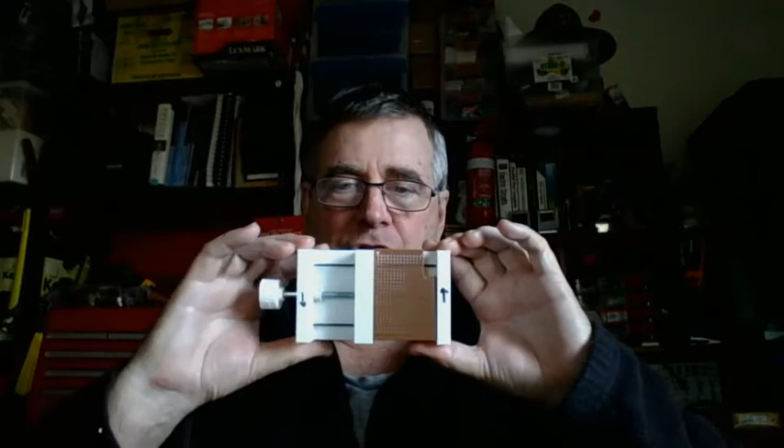This is a prototype of what we're trying to build, which is a PCB board holder. This prototype functions and works, and I'm physically using it, as you can see. I've actually used it to do a bit of soldering work and cut some stuff, and it works just fine.

I went from that to this, which was a failure. It was a failure because this bar is too high, and it still works, as you can see, but we've had some feature creep.

We've now got a handy helper arm which isn't really doing what it needs to do, and the hardware that's in that is going to get recovered, and we're going to go to this, which is the final candidate, and this doesn't really work for me either.

The holes are just a tad tight. PCB holders in there.

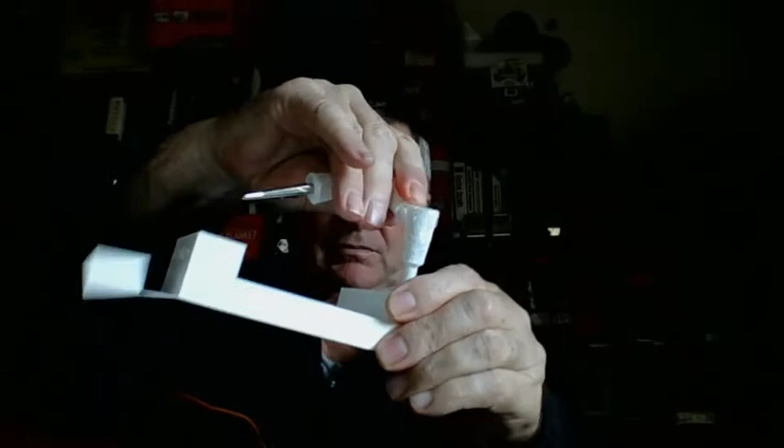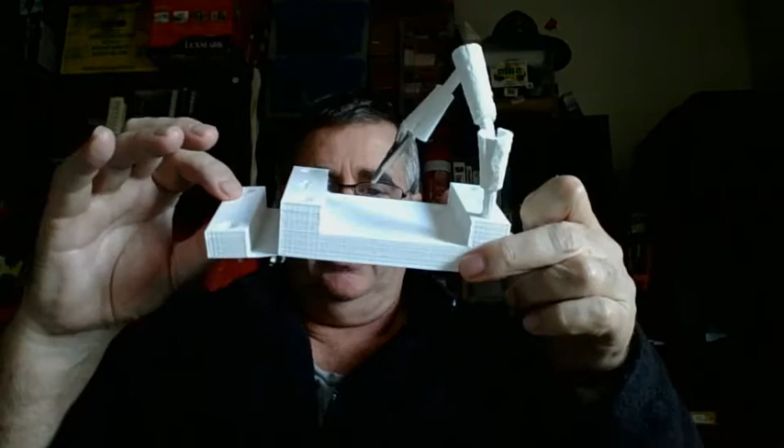The idea is the handy helper arm's in there. It works. It's got modifications in that it's got accessory holes and mounting holes in it, and this will be the final design. I'm not going to muck with this anymore. You're more than welcome to muck, but this is our final design.

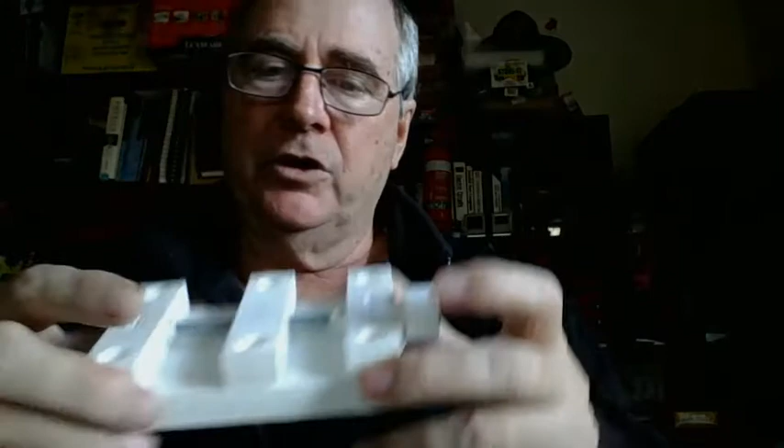In getting to this, we went from this to this to this, and as you can see, I haven't bothered assembling it. I've got to take the hardware out of this one - this was a failure, it's got to get recycled - but I'll take the hardware out of that, put it in the new one, and that'll be it. I'm not going to muck with it anymore.

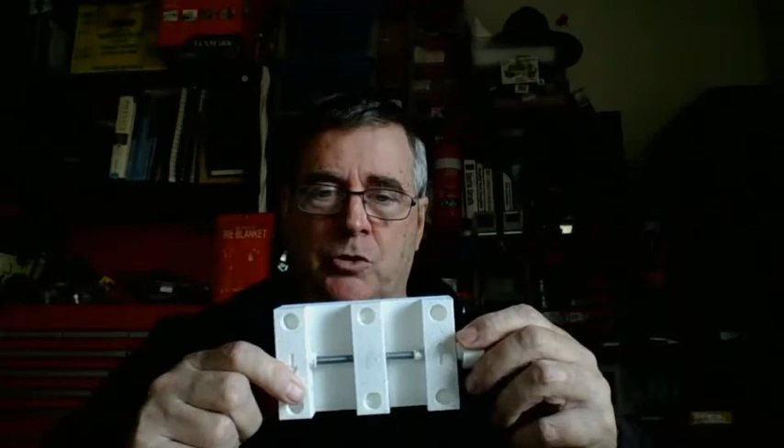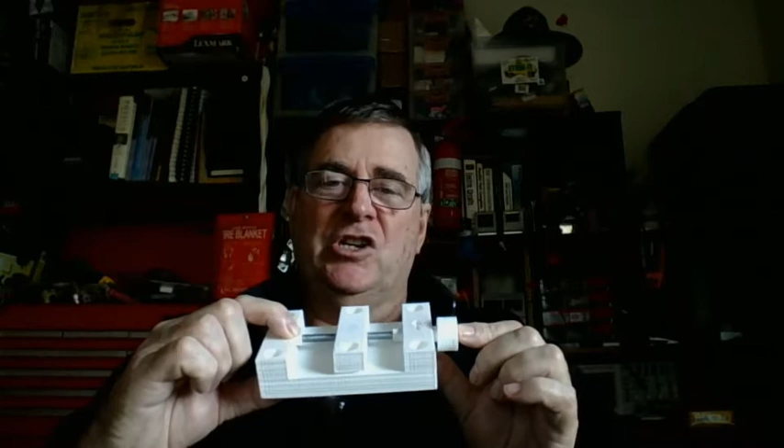You need a bit of hardware. You're going to need a bolt that's that long - it's a 6mm, 6 mil. So that is from there to there is 10 mil. It needs to be at least 10 centimeters - from there to there is 10 centimeters. It needs to be at least 13 centimeters long, this bolt. It doesn't need to have thread for the last 3 centimeters, so it's got to have at least 10 centimeters of thread, and they're M6, so they're metric 6 mil, and they're a standard gauge, right?

So I haven't gone to any expense there, and that's a standard 6 mil nut in the center of this, so that when you look, you see there's a hole there to take the nut, so that it winds forwards and backwards with that. So that's just a nut and a bolt. Nothing special.

I've cut the head off this one and used my own system, but there is an option with this that it's made to fit over the hexagonal head of a normal bolt.

This has the option of the handy helper accessory holes, but you can also use that for extendable jaws.

So you can make specialized jaws and plug them into those holes, and then it can hold odd shaped PCBs, for example round ones or hexagonal, stupid shaped, odd shaped. I think the iPhone has now got, and I know the Nintendo Switches have a stupid shaped board. So whatever shaped board, you can make a jaw and push it into the holes and hold the board securely while you work with it.

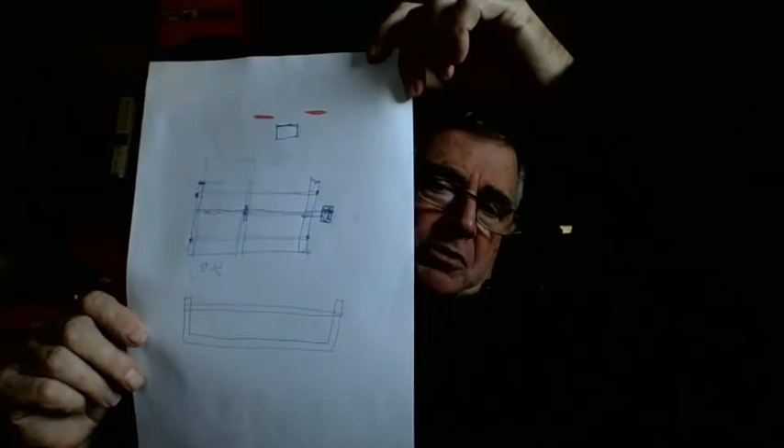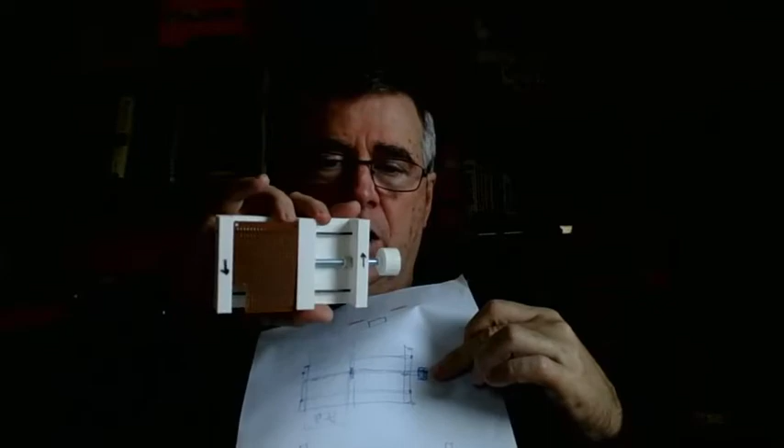It's got bits of coat hanger wire as guides, and that was my thinking. I could use an old coat hanger, and I had these. They're galvanised, they were hook shaped. They had a hook in them with a thread, and you'd put them into a bit of wire — they're there really for hanging a bit of wire between, and you tighten them up, and the wire gets tension on it as you tighten it. That's what they were, they were two hooks.

So I had two of these things, and I chopped the ends off them with a grinder. I'm going to assume that you're going to have the correct hardware — it's just going to be a bolt, more than 13 millimeters long, and it's an M6. I've made it to 6 mil.

And you can use gal to save a bit of money. This doesn't need to be stainless, but if you've got stainless, well, you've got stainless. It's more expensive, but it is what it is — you got what you got. You can get some threaded rod if you want to, and just grind one end of it down. If that's all you've got, then just get that. And you can get that at the hardware as well.

I went to the nut and bolt place. I always go to specialist shops for whatever I can and support them, because they rely on you doing it. And even though they're a bit more expensive, sometimes they're not — sometimes they've got exactly what you need at the right price, and sometimes they don't have exactly what you need, but they'll come up with something.

I've always gotten myself — you know, if I need tools, I don't go to the hardware for my tools, I don't go to the supermarket. I go to a tool place, and I support them, I give them my business. And if I need my tools fixed, I go to the tool place, and if I can't fix it myself, I take it there. Sometimes I need bits and bobs of cheap tools, and they laugh at me, but they fix it, and they charge me for it. And they said, for what you paid for that, you could have gone and bought a new one from the supermarket. And I just said, but I want to give you the business, so I do.

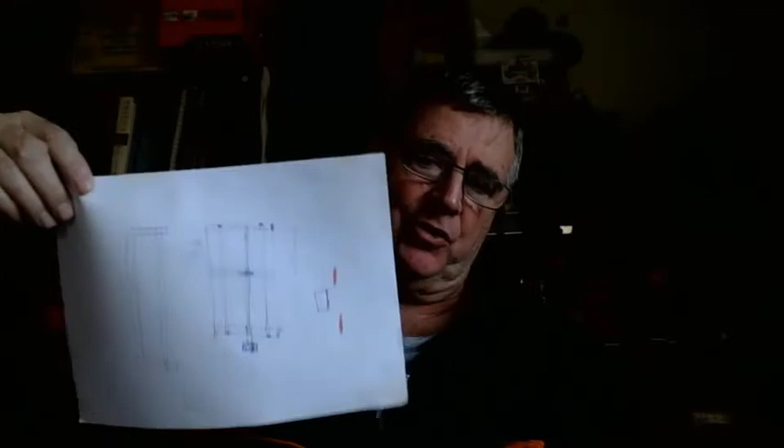I want to show you that with ad hoc design, I mean, that is a structured start. And most people start building something and fiddle with it, and then they come up with something there and they think, oh, that's terrible, and they turf it.

And then they come up with something like this. In the handy arm, I ended up 3D printing a bunch of stuff that I didn't end up using - I don't know where it's gone, I've got stuff everywhere here. Sorry, here it is. So then I printed these things out, and as you can see, if you want to, you can add them to your arm, so you can get your arm way up here somewhere.

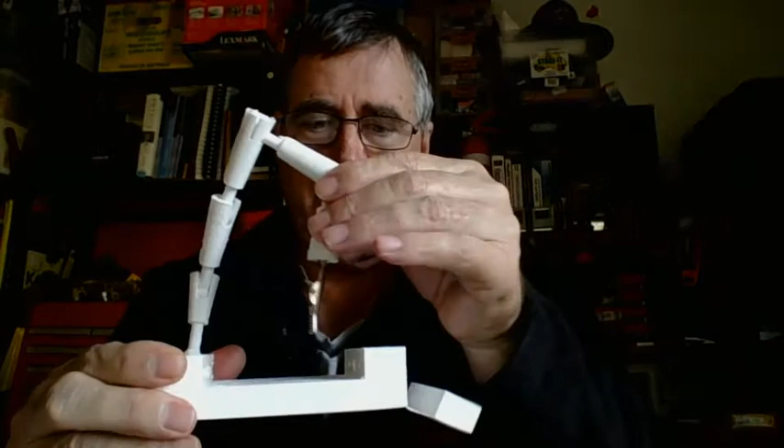Right, so now we've got an arm that looks like that. It still works, and now you can really get jiggy with where you want to put things on the board. You've got complete freedom of motion there.

It's up to you. You can keep building components for it, and build things to hold specialised whatevers and bizzos and whizzos and crizzos and stizzos till the cows come home. So let's get into it.

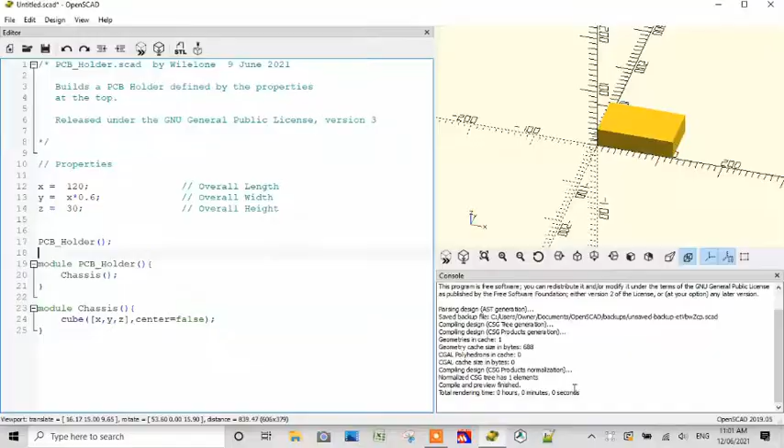I'm going to swap cameras. Okay, so I've got a problem. Right, there we are. Okay, so hi, back again.

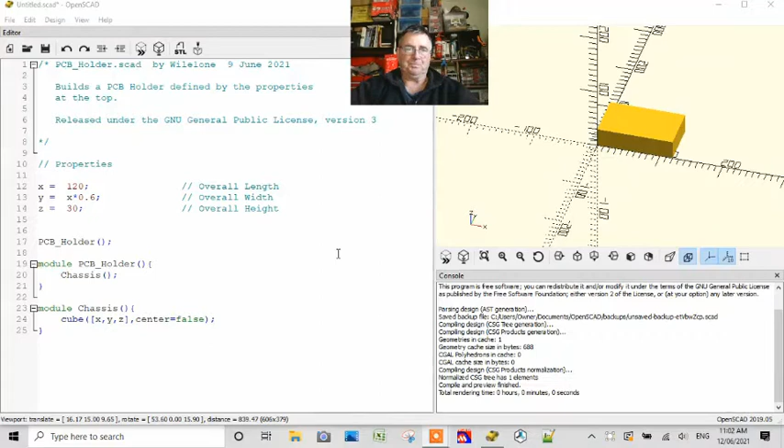So I've quickly thrown this together on OpenSCAD. Let me give them a bit of a shout.

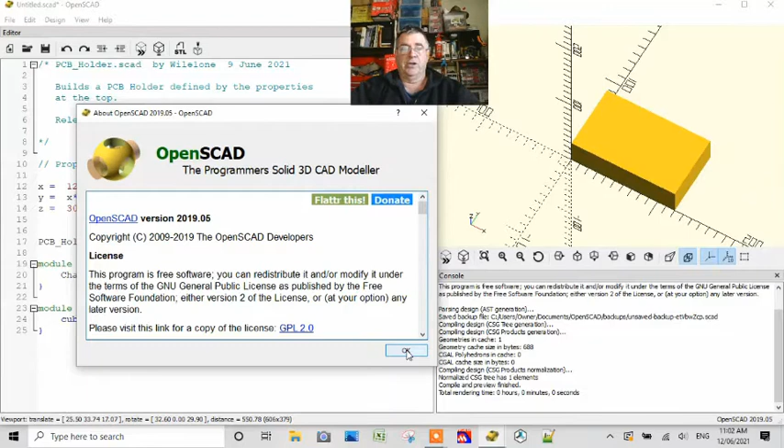Right, so I'm using OpenSCAD as the CAD system for our PCB holder, and what I'm starting out with is a square block of plastic. Here you go. I decided that I want the width to be 60% of the length, so that's how I've designed this. You can change these to whatever you want them to be. I'm going to start with that.

Now I need another dimension in here, and that is the support width. So I'm just going to call it SW equals 10, and I'm starting at 1 centimeter, for those of you that need that.

Right, so once again we're doing modular design. We've got our holder, which consists of a chassis, and I'm just going to create the void. So I'm just going to go here again. And this will be x minus 2 of these, Y plus 2 mil, and Z's fine.

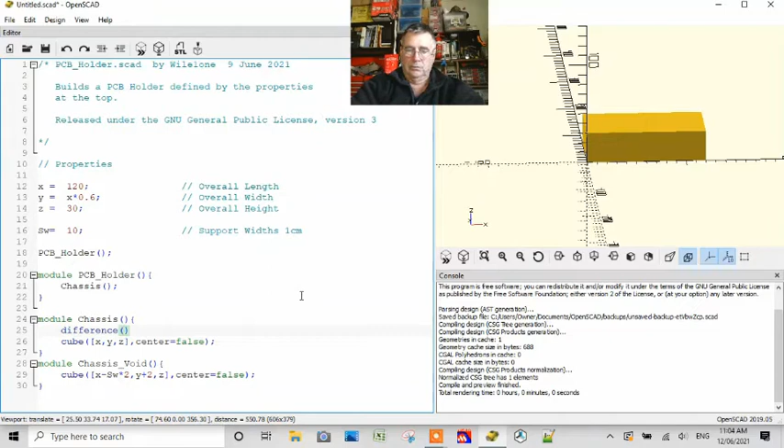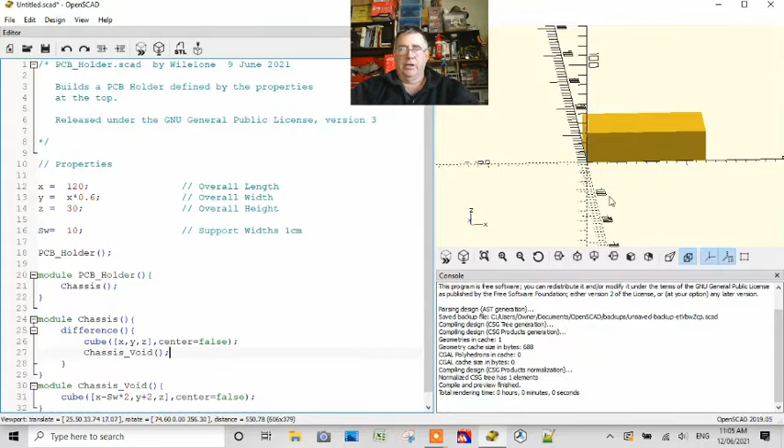Right? And to get our chassis, what we need to do is we need to difference, we need to cut this out. So we want the chassis, and then we want the void cut out. That's how we're building our cube, our base. And right now, if we do this, we're going to get it cut out in the wrong place. Let's just show you what's going to happen. Okay, so it's in the wrong place, nowhere near where we want it.

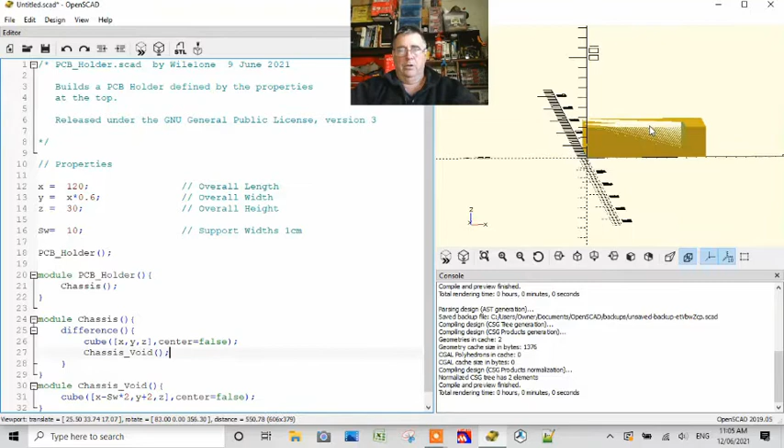The length is fine. What we need to do is translate this, move it. So we're going to do a translate, and we're going to move our cutout in the X direction, that way.

The camera is facing in the wrong direction. In the X direction, which is down here in this direction, we want to move it the width, the support width. So we want to go SW, in the X direction, positive, which will put us correct.

Now let's just go 0. And in the Z direction, we want to come up the support width.

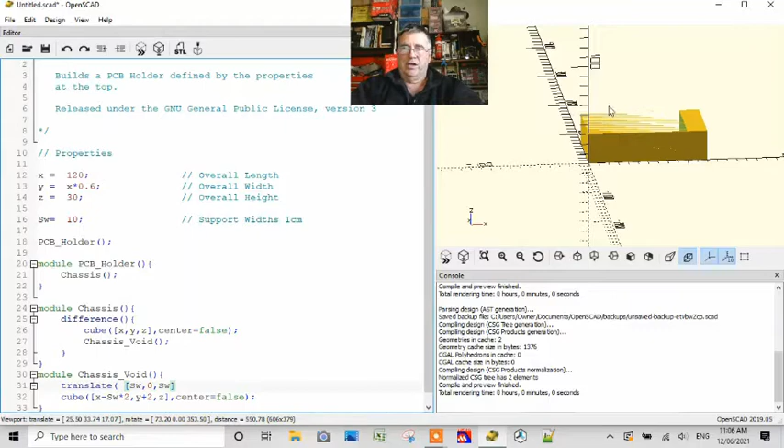I know this is going to be a problem because we're not going to come through the inner wall. Let's just do this to show you what happens. You see all of this here? All of this stuff here? It's because we've not penetrated the wall. And so to make sure we get penetration, we've added 2 mil.

So if we go -1 here, we're going to penetrate 1 mil either side. So let's close that off, and we should get our thing where we want it. And there it is.

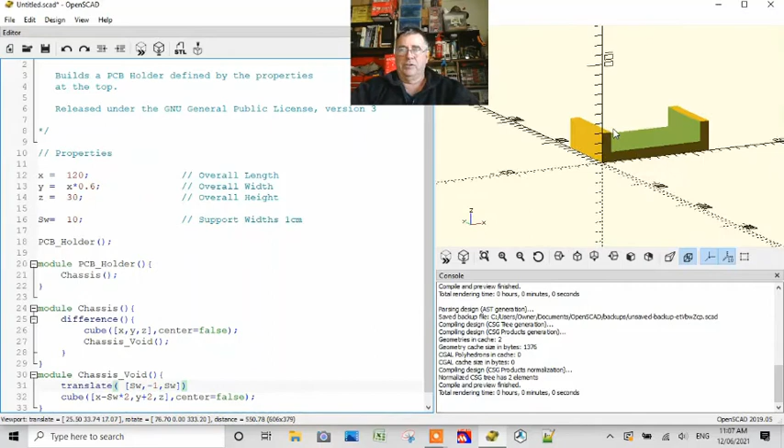Right, so there's our bed. Just like that, we've got our chassis and our void. That's pretty cool, isn't it? Everyone like that? I like that.

Now we need another couple of things. In one end of this thing, we need a hole, and in the other end of it, we need just a little thing for the screw to sit into, so just a rebate. So we need a hole through one end and a rebate through the other, and we need it.

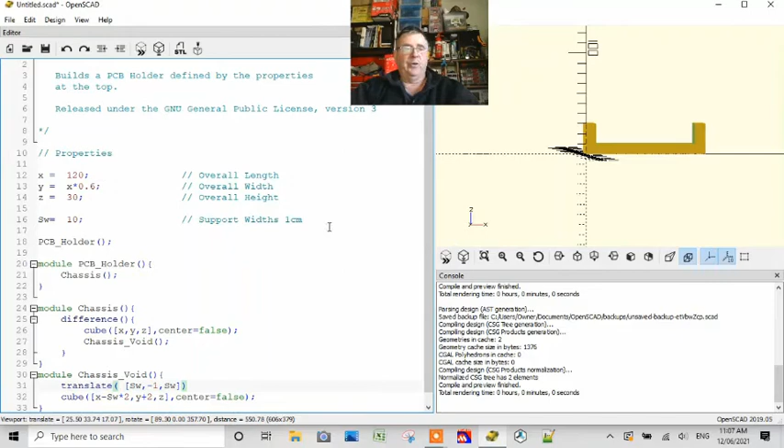Now we didn't say how big we want our hole to be, so SHD, the screw hole diameter, is going to be, I don't know, we'll make it an M6, 6 mil. I don't know what that needs to be yet. We can come back and change it. And this will be our screw hole diameter.

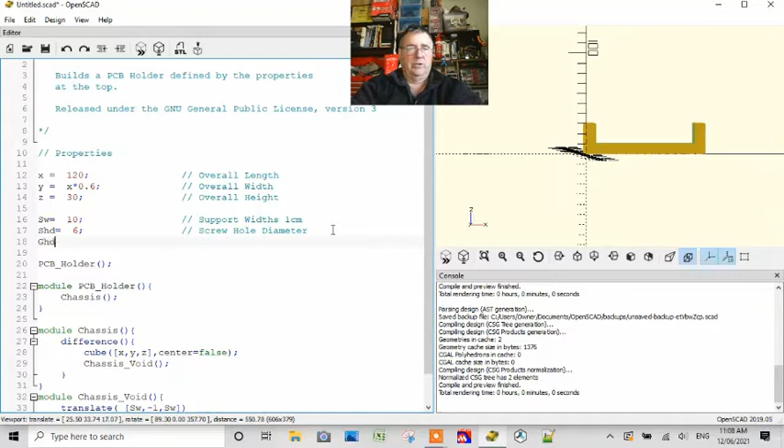And then we're going to do a GHD, and that's at the moment a piece of coat hanger wire which is about 3 mil. And that's our guide hole diameter. So let's add them to our void.

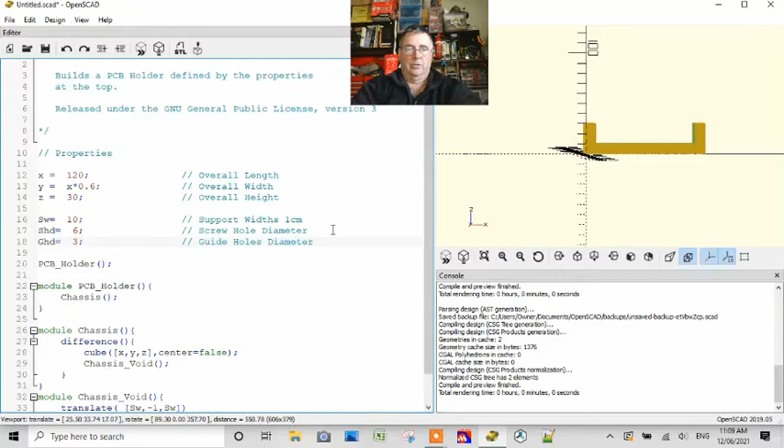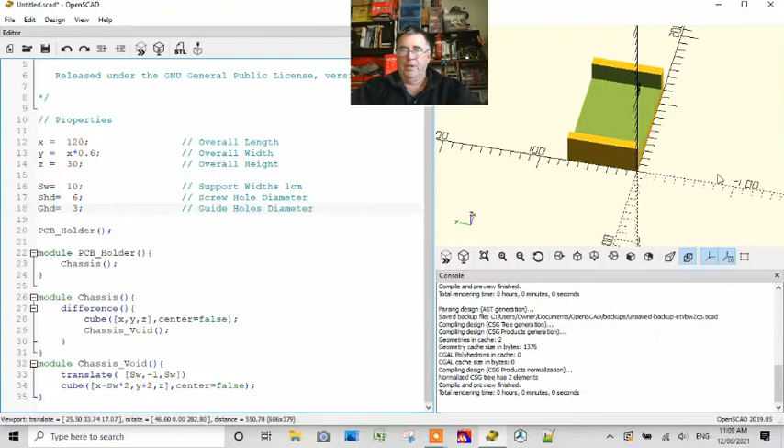Right, so we want a cylinder. We want one cylinder that we need, well actually we need 2 cylinders that penetrate and 1 cylinder that just creates a rebate in one end. And that's pretty simple to do.

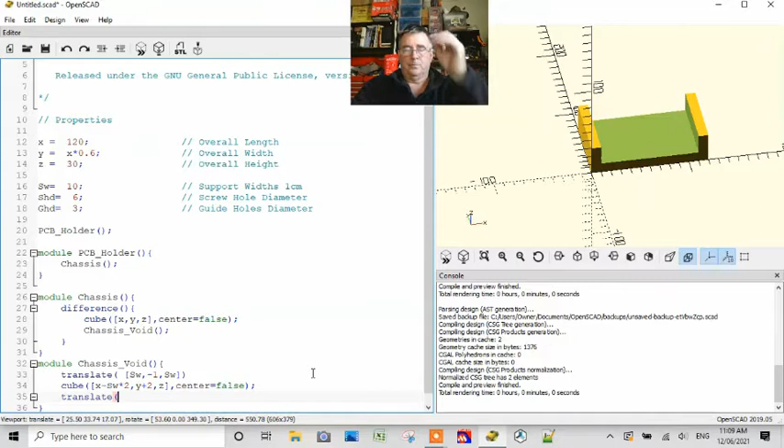So let's go again into our void. Let's create a guide hole. So let's go, we want a cylinder. We're going to translate this thing, and we're going to come in the X direction of -1.

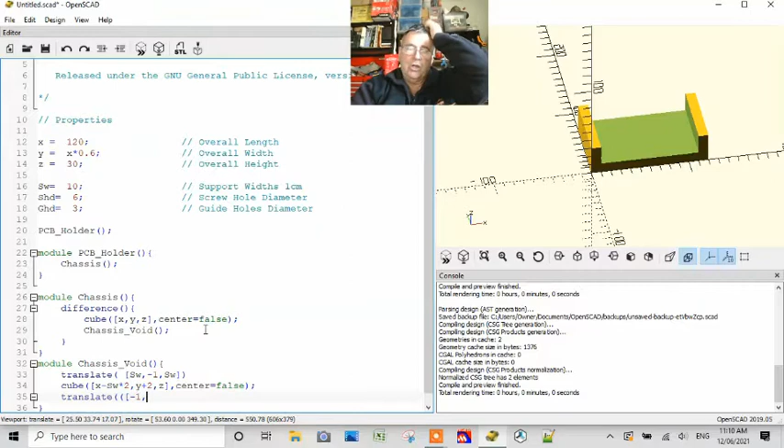So we want it to go through the end of the guide here. So in our X direction, we're going to travel -1. In our Y direction, in our first guide hole, we want it to be in.

Let's go with the SW for the moment, and we might put some kind of a factor times 1.2, you know, just for the hell of it. And in our Z direction, we need to be the SW times 1.5.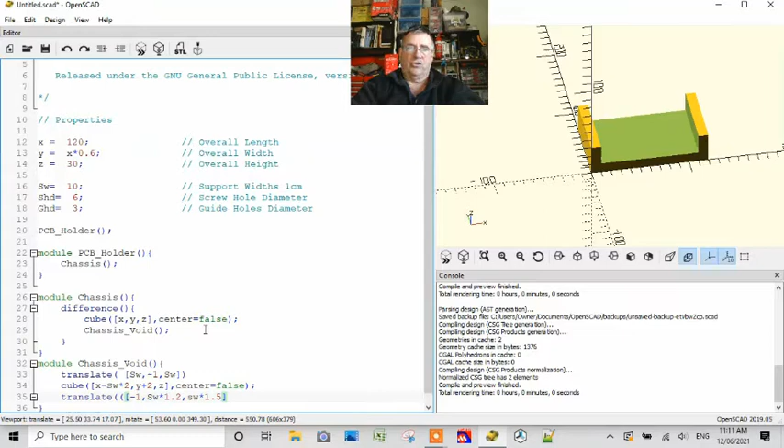SW times... now we're going to have to fiddle with this one. We don't really know where it's going to land in a final version, but we'll go at 1.5, which will put it slap dab in the middle of the bed. It will be at the bottom of the slide, but at the moment it'll be slap dab in the middle of the bed. And we want a cylinder.

And our H equals 2 times SW. Oh, no. No, we've got to rotate this thing. Oh, I'm getting ahead of myself here.

So we need to rotate this thing around the y-axis by 90 degrees. So we're going to do rotate, 0, 90 degrees in y, 0. And that should put us in the correct orientation.

And our height is going to be the length, x, plus 2, because we're going 1 mil penetration either side, right?

Our D equals, what did we say? D is guide hole, GHD, comma. Our center equals false. We need our facets, $FN. 60 will be fine, 60 facets around this, so it cuts us a nice round hole. And we want our center to be false. Center equals false.

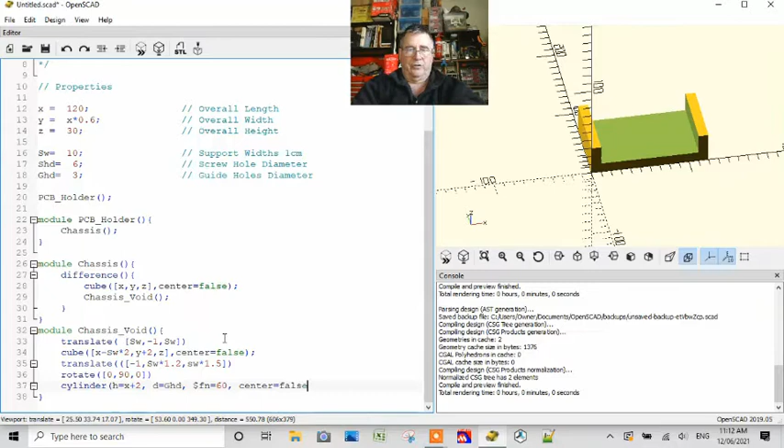All right, let's see what that gives us. Whoa, what did we do wrong there? Rotate. Doesn't like something. Oh, here's our problem here. We've got too many brackets. Right, let's have a look.

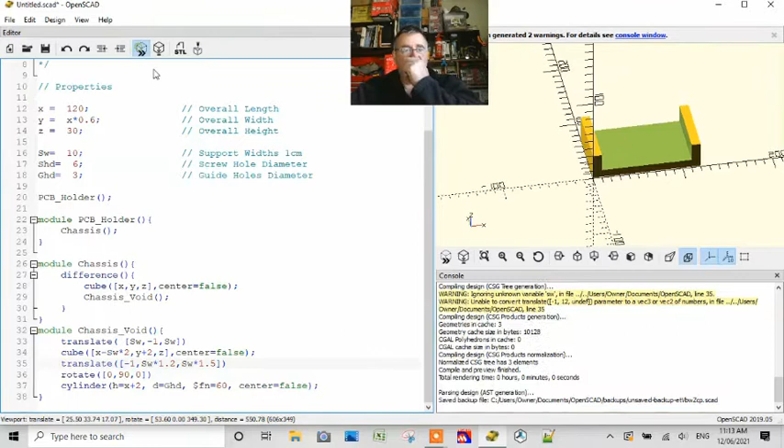SW is wrong. That needs to be a capital S. So let's see, come on, have you put a hole through it? Yeah, look at that, put a hole through it. There it is, right through the lot. It's dead smack in the middle of the other one.

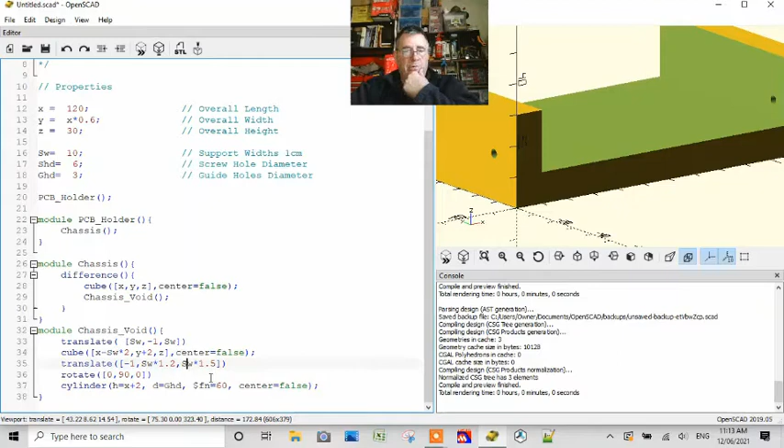Now, I'm just going to bring this and call it GH, guide hole Y, and bring it up here. GHY equals Control V.

And that's our guide hole indent from the edge.

And we want a HHZ, which we've said it's 1.5, and that's our guide hole.

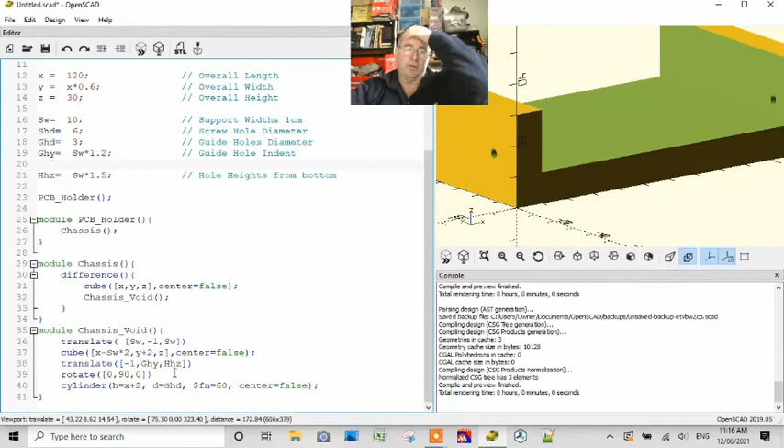Now we've got to mirror this on the other side. Now we can use mirror, but we're not going to. We're just going to do the same again. We've already got some code, and we're just going to recycle the same code and just move it over where we want it.

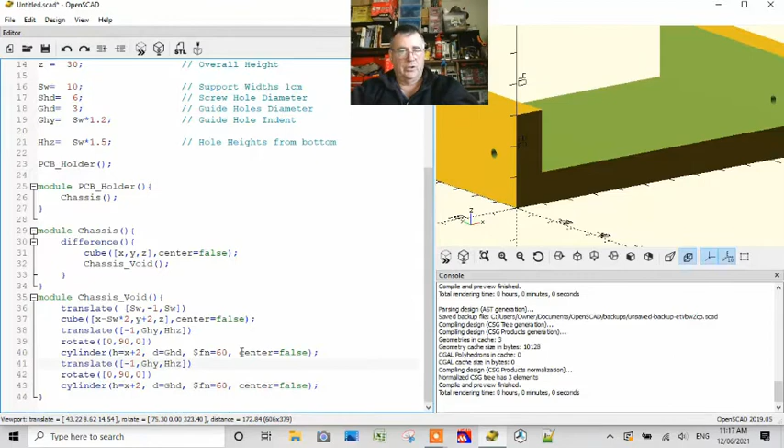And this will be in the Y direction, the Y minus - it's going to be Y minus that, so it indents inwards. Let's just run that.

Ooh, what did I do? What did I do? Variable Y, why do we have that? What do we do there? How did we get that? I don't know. I think, folks, I'm losing it. Okay.

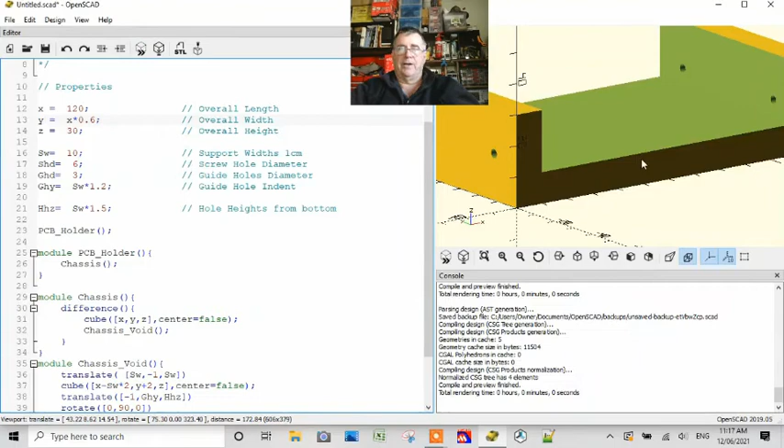There's our two screw holes, our guide holes. We're not going too bad. We're doing all right, we're doing all right.

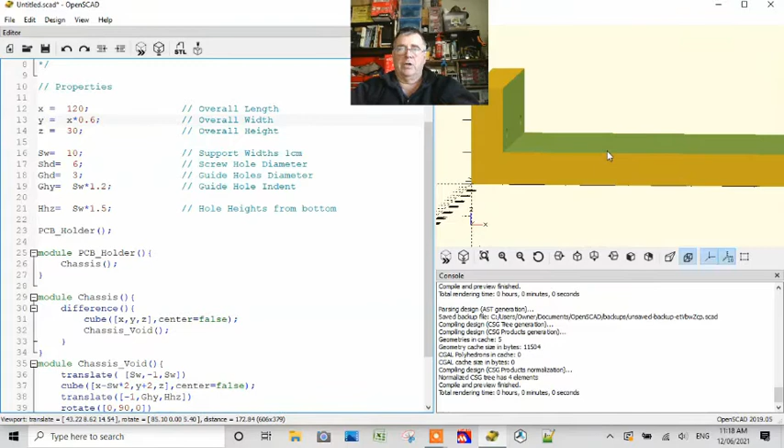Now what we've got to do is put a screw hole through the center, but it just needs to be rebated on one end and through at the other. So our rebate just needs to be so that the screw can turn inside it. So it needs to be slightly thicker than the screw's going to be. At 6 mil, it's going to be like if it's an M6, it's going to be right there.

So we want to just give it a bit more. We want the thing to be able to turn freely inside. Now we're mucking up our neatness over here, and we're just going to tidy that up a bit. So just give it 0.2 of a mil so that it'll spin freely. That's all, it just needs to be slightly bigger than the screw.

And that's going to come in here too, and we want another cylinder for that. Now what I've done here is, okay, so this is the bed rebate. This is the right hole.

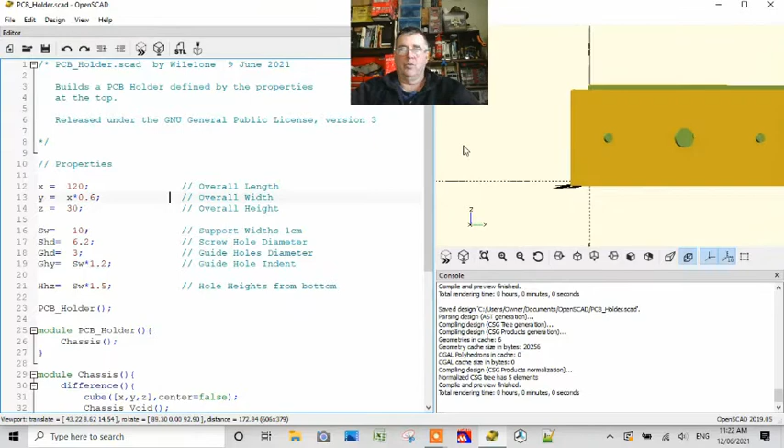But let's run this, and there's our screw hole. You can see at one end we've got a rebate, and at the other we've got a right through the middle. So there's our bed built. It's completely built, that's what we're going to end up with.

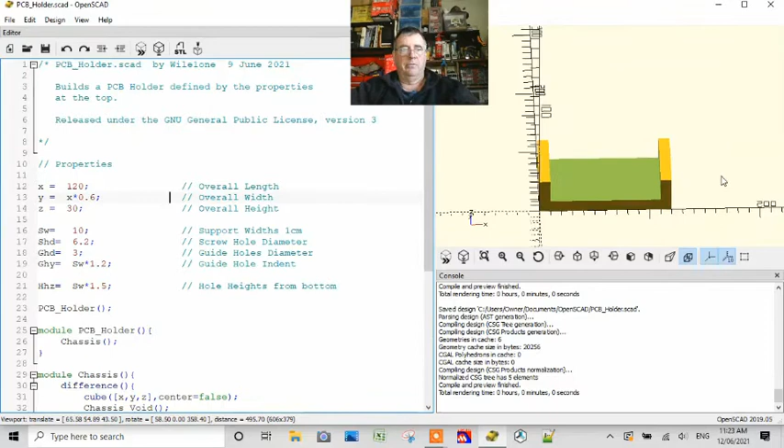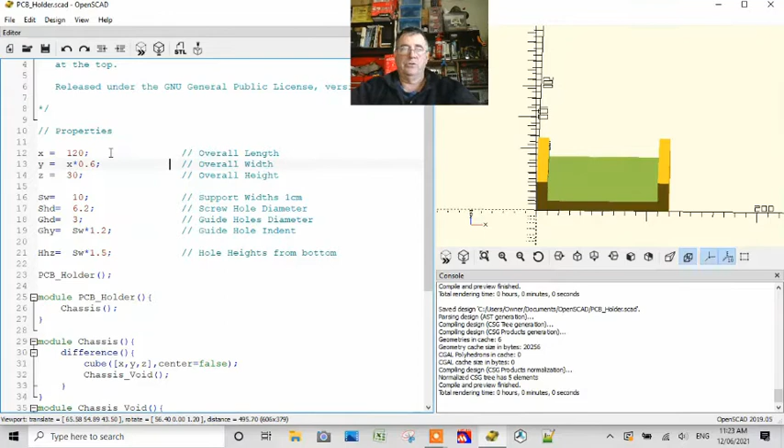And now finally, we've got to put our sliding piece that sort of travels backwards and forwards. Right, so we've already got the dimensions for it. Believe it or not, we don't need to give it any more dimensions because we've got everything we need. And we're just going to make it. So we're going to call this the slide.

For the moment, we're going to build it in the middle of the thing, so you'll get an idea of what I'm on about. But then I'll move it to the end so that when we 3D print, it'll print the two sections as one job.

Because I want to move it later, I'm actually going to define the translate up the top. So I want to be up here, and I'm going to put a translate here. I wouldn't normally put these in this spot, I'd normally define them as a variable up the top somewhere. But for the moment, I'll put it up the top.

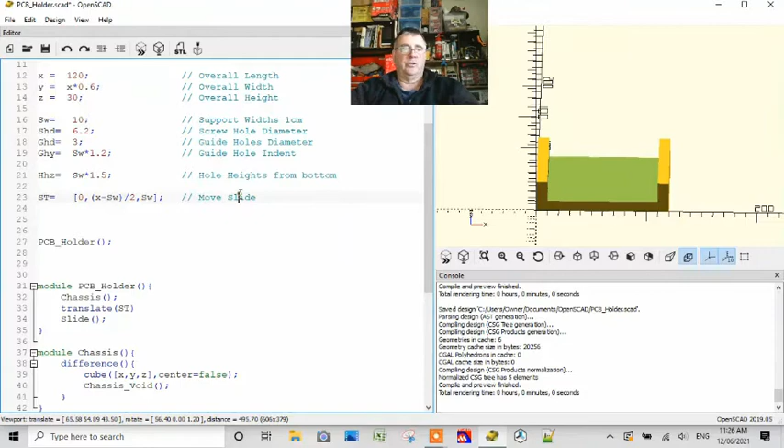So this is our slide, it's actually going to be the jaw. That's what it is. Right, so that's our jaw. Beautiful. Now we know what to call it.

And all that's going to be is a cube. We're not translating it at the moment, we're just going to chuck some holes in it.

How cool is that? We could use the... we could use the void.

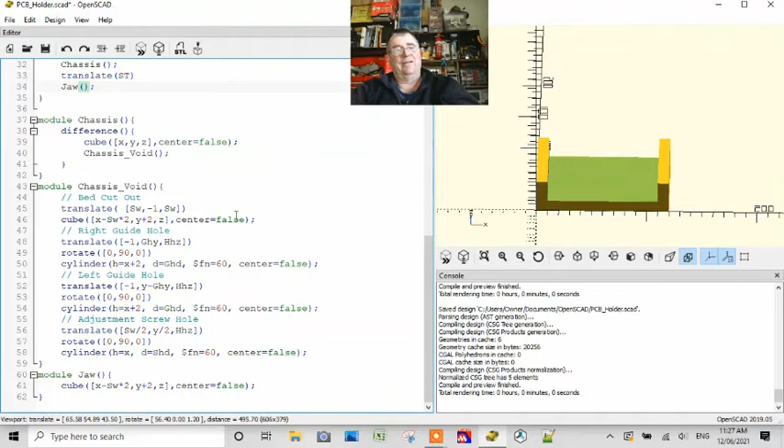Look, we could show you what it's going to look like very quickly. Let's do that, let's do it. I'm just going to show you what it's going to look like rather than bugger around for too long, just real quick. This is just quick and, no, that didn't work at all.

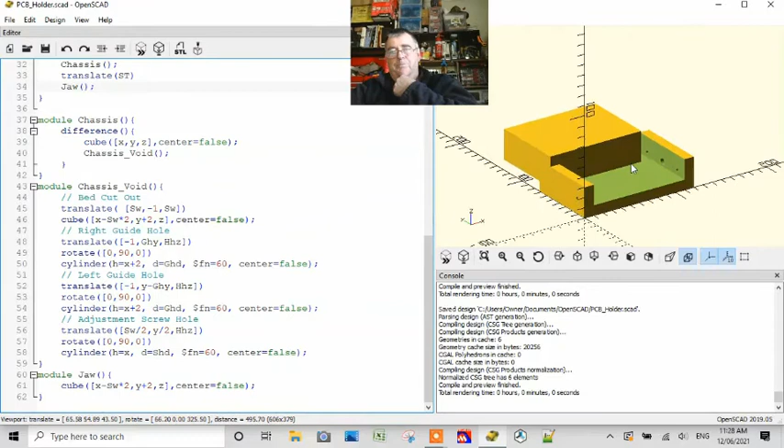Let's put it here. Oh, look, I'm trying to be too clever. Save. Oh, all right, whatever. Okay, so X is SW, Y is Y, and Z is Z.

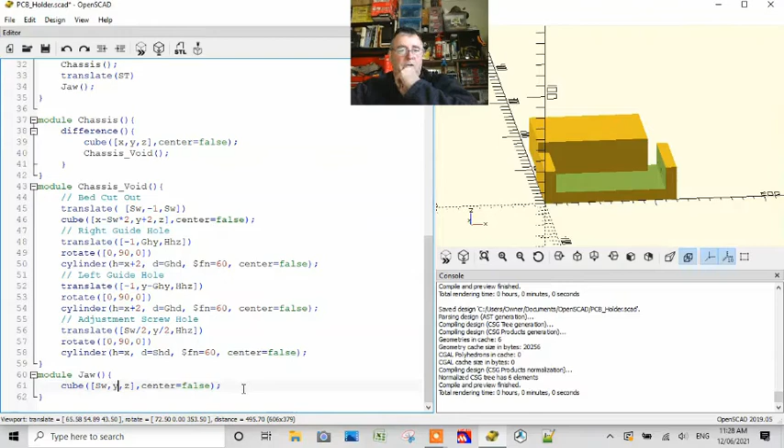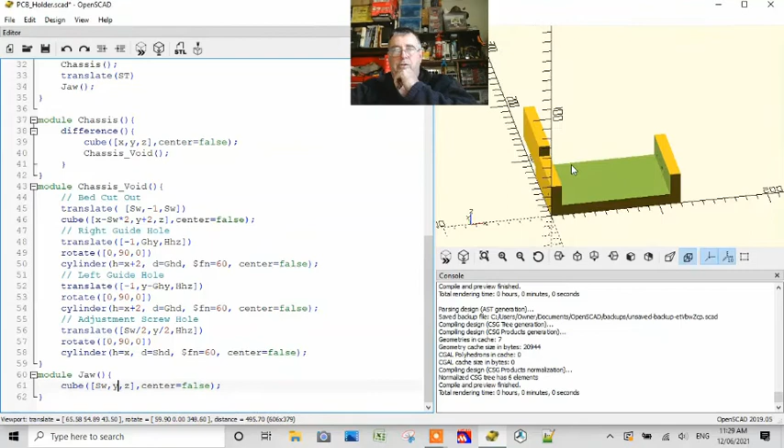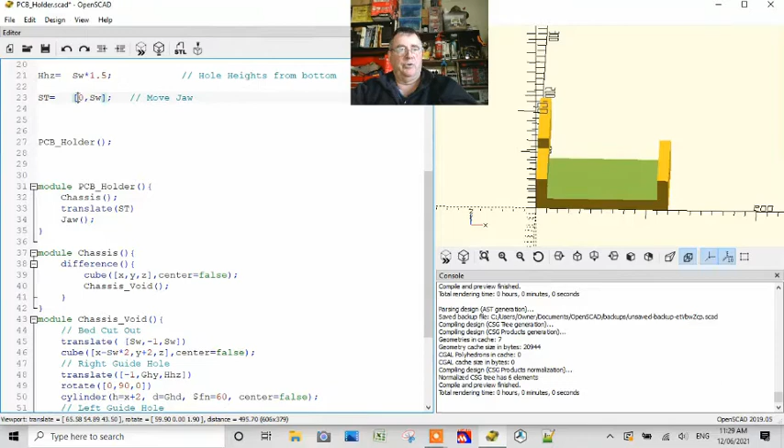We should get our slide there. Right, so now we've got to move it where, you guys, it'll make sense to you guys. So we've moved it in the Y direction, we want to move it in the X direction. So that's a bit of a furphy there. Control X out of there and put it at the front so it's moving in the X direction. Just bear with me, folks, you know, he's gone mad. So this is what it's going to look like.

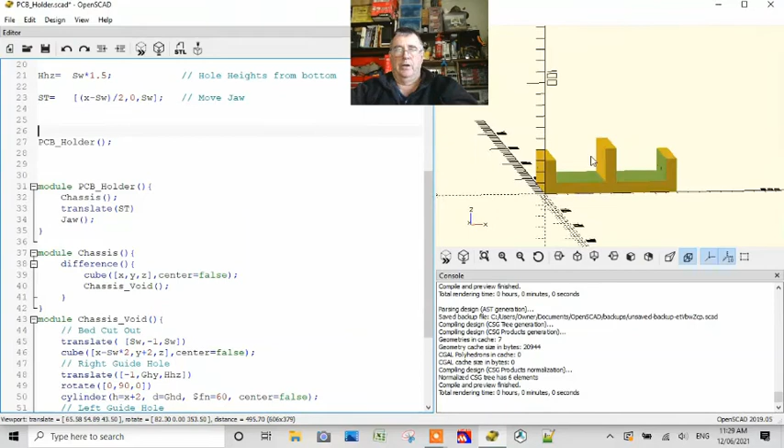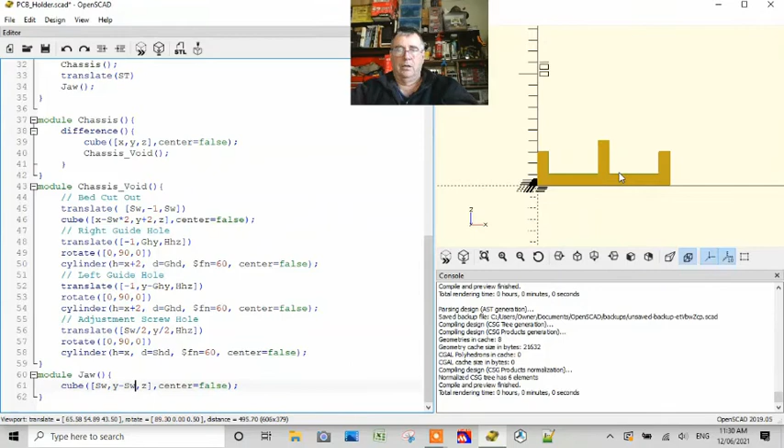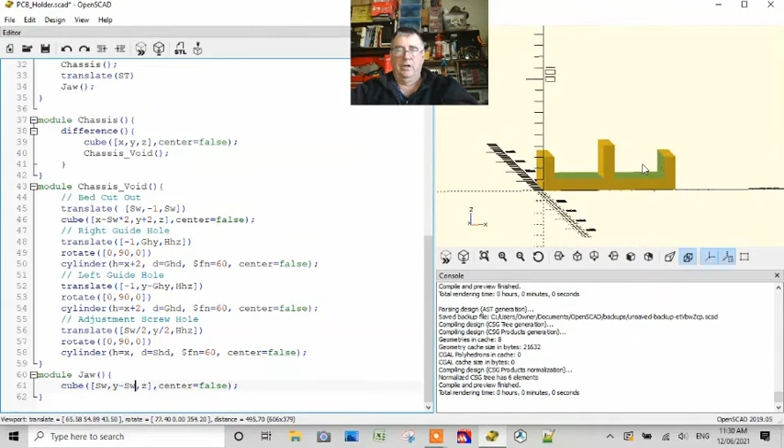Right, I've no idea why that's gone up. SW. Oh, Y minus SW. Sorry, I'll get there, don't worry about me. That did not change at all. I expected that to drop down to the same height. Yeah, okay, I don't know why. I'll fix that in a minute. I asked for a cube, SW.

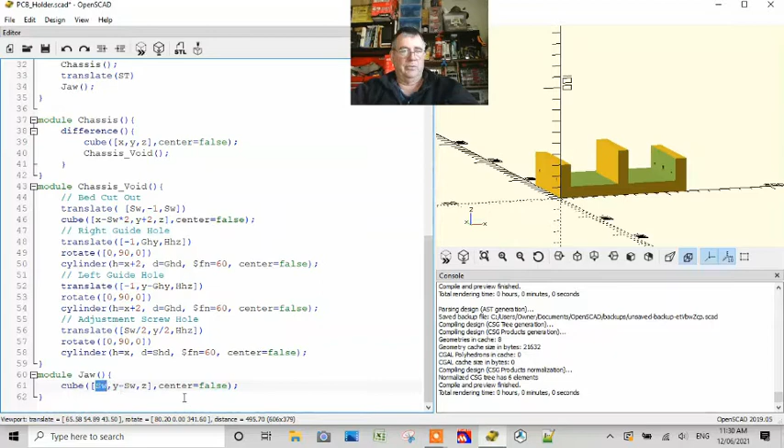So you can see here that the design's going off the rails, and there's probably another hour of footage of me fiddling with the design and mucking about. At some point I realised where I've gone wrong, and quite frankly none of this was necessary. Had I sat down with my design and put some dimensions on them, I would have had very clear definitions of variables. I would have been able to pick that off from a drawing and put them onto some kind of an entity plan, from which I would have started to build my classes and properties and the sets, lets and gets and so on. And that's proper object-oriented design.

Now, we're not doing that, of course. We're ad hocing this, and we're in a mess. You can see how confused I am, and it's all going off the rails. And it goes off the rails, to the tune of, I've probably got another 3.5 hours of footage to get to the point where I'm actually using the 3D printer.

So I'm going to skip quite a bit of stuff, and just assume that yes, we fiddled and carried on, and we finally got to something that means something - this prototype where we started to print this out. At that point we're going to end the video, so I'm just going to chop that out. I'm going to show you to the point where I'm 3D printing the prototype, and we're going to end this video. All right?

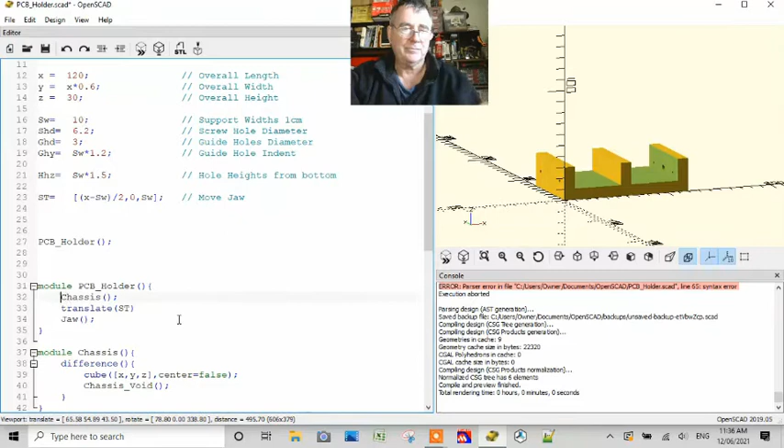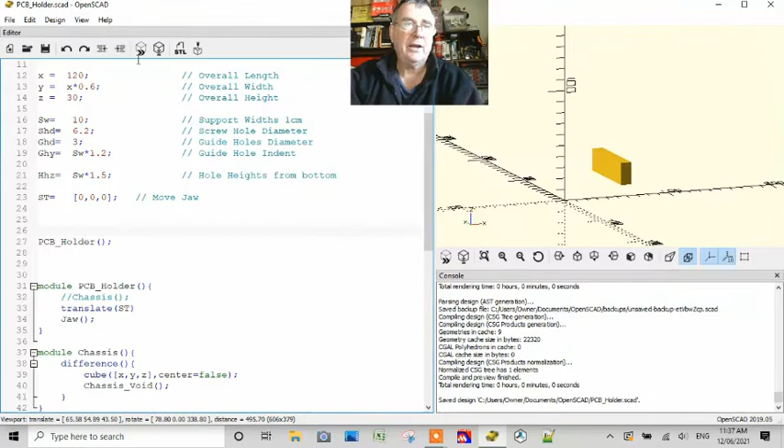Right, so let's do this. We're going to take out the chassis. Let's go, just for the moment, for the hell of it, we're going to set it to 0, 0 and 0. Save that and run it. So there's our jaw at the origin.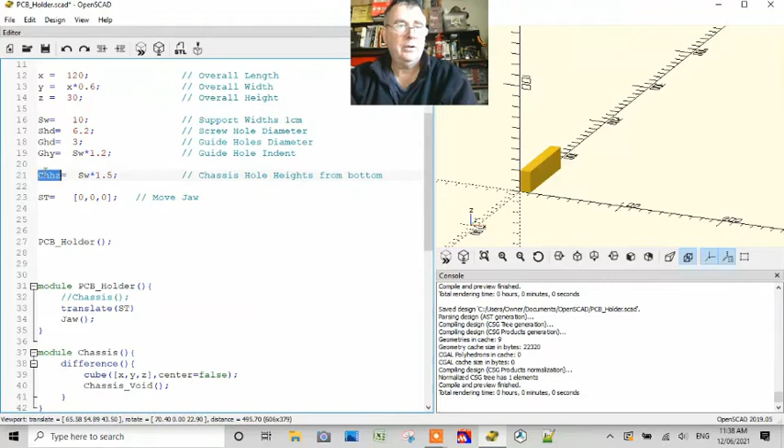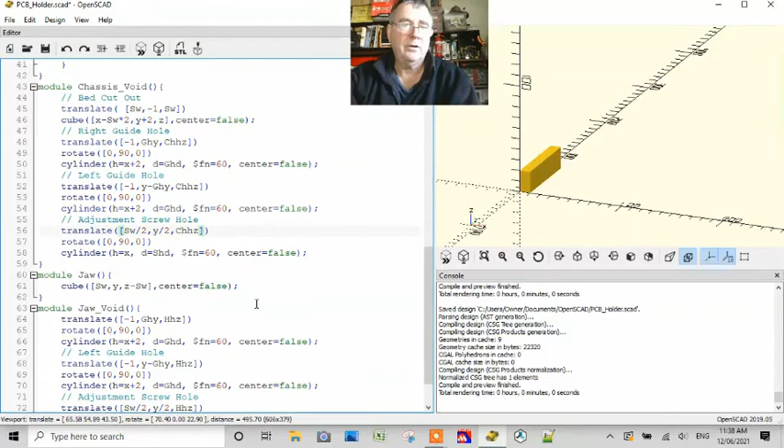Literally, what we need to do is calculate - we've already shaved it by SW. So these are the chassis hole heights from the bottom, but our jaw hole heights have to change. So I'm going to change that to chassis hole height Z, and just come down and change that. There. And then I'm going to calculate a jaw hole height from bottom.

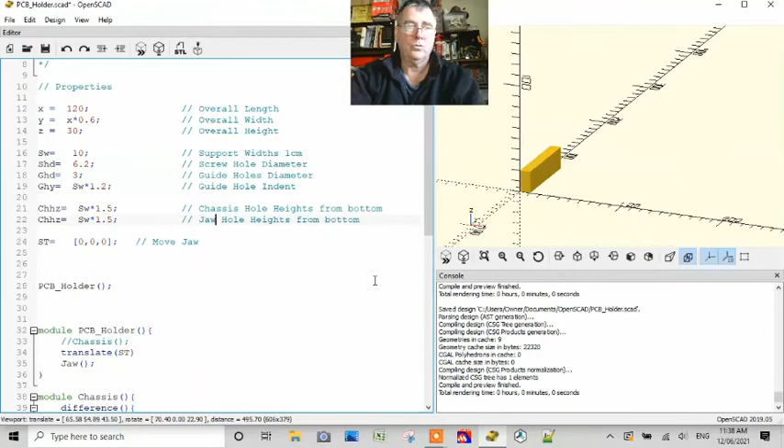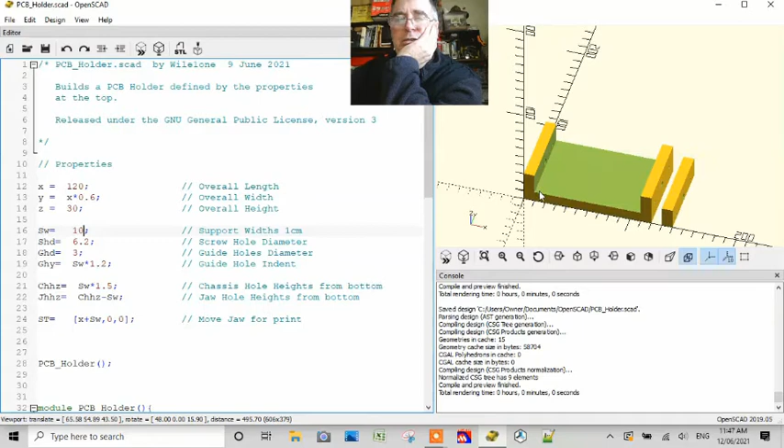For the 3D print spare parts, I don't know that I even want to bother with the alfoil. I think I just put the alfoil over the bits that are exposed to being splattered by solder and call it done. Just over this bit here - I think that's all we do, I don't think we bother. I'm getting lazy, I really am. I could just as easily cover everything, but I just feel a bit lazy.

Okay, let's get on with it. So there we are, we're ready for 3D printing. I'm going to save this and export my file. I'm rendering it for export using the render, and then I'll export the STL.

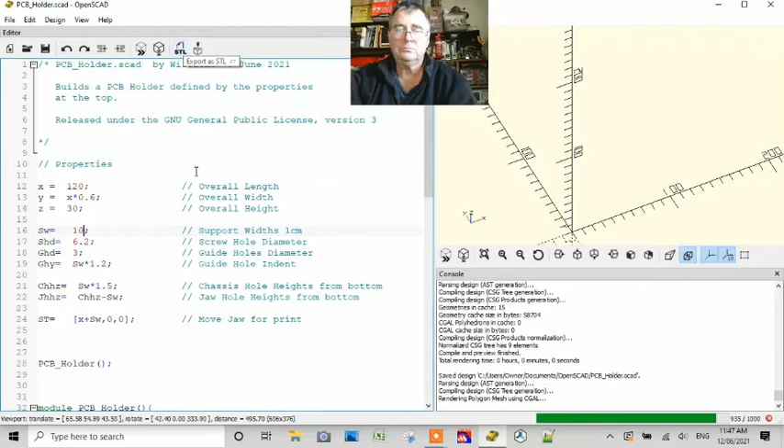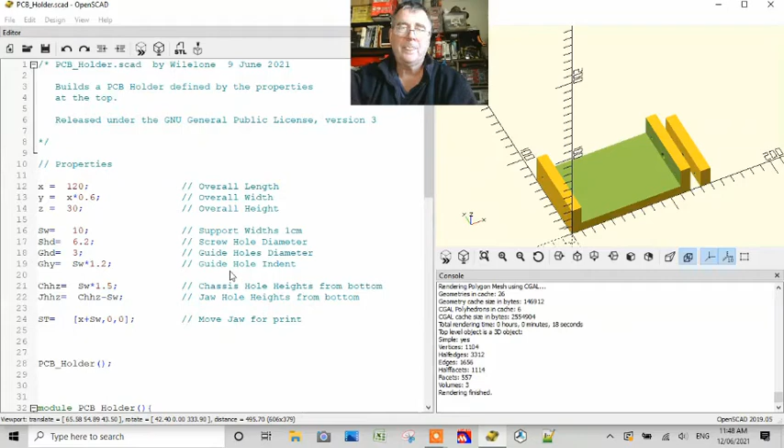PCB holder, right there. Done, beautiful. Let's fire up the old 3D printer. Let's get into it. I'm just going to plug in, print one out. Job done.

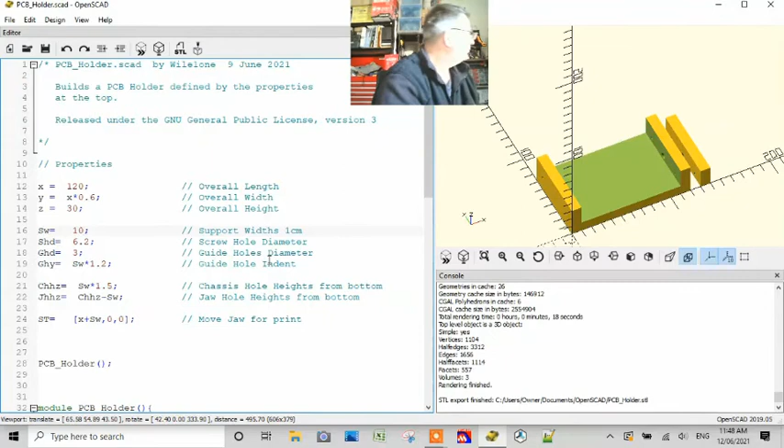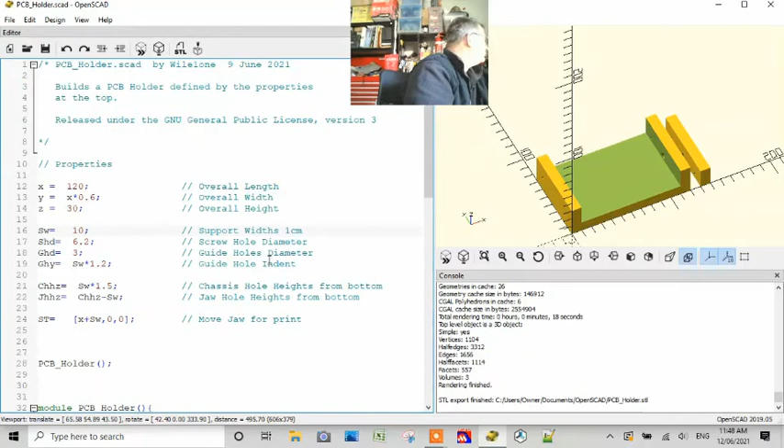Now where am I? I want to turn this on. Got to do something about this fan. It's working fine, just noisy. There it goes, all right.

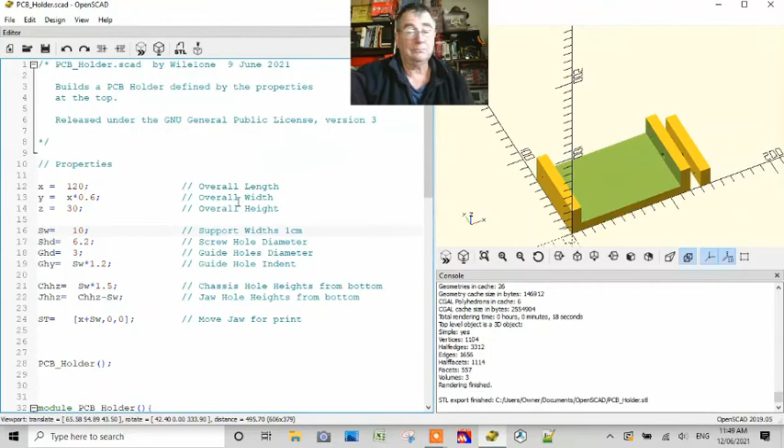So we're turned on, I need to swap over to the PCB printing software. I'm just going to shut this down - I've saved everything. I'm just going to swap over to my control for PCB printing or 3D printing. Yeah, I do have PCB printing software, but I want to do 3D printing. Excuse me, I'm going to set this up.

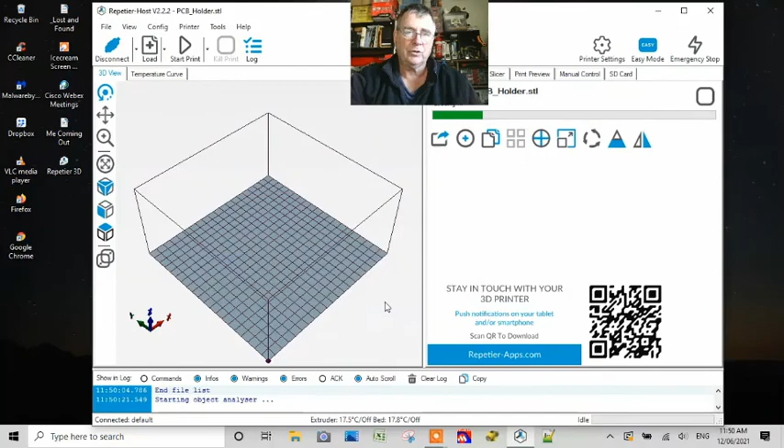So I'm going to load up my design - Open SCAD, here's our PCB holder. Open, let's just have a look at how it lays in. There it is, that looks like it's going to print out just fine. Nicely on the bed, nice and center. You can see it's got no problems, it's happy to have brought it in where it's brought it in. Just move me out of the road so you guys can see.

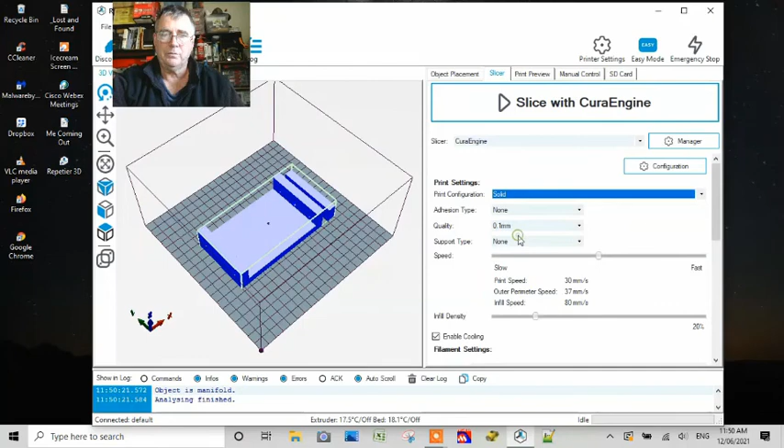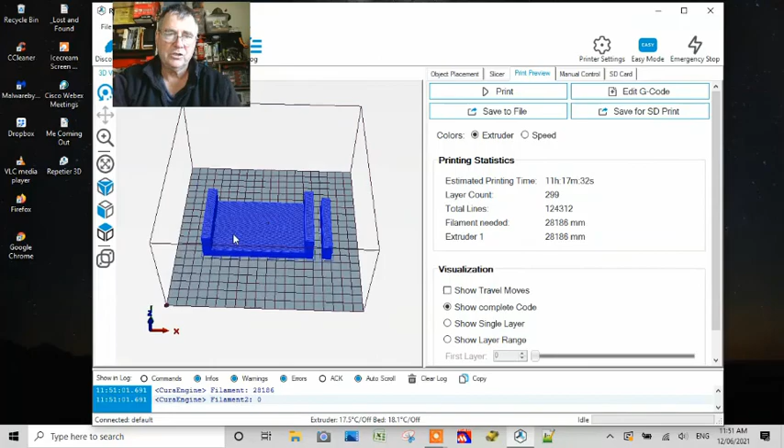So I'm going to go into slicer, now I'm going to change this quality. I've got a solid profile set up. So let's slice that - this is going to take some time to print out, it's going to be quite an involved print. I'm just going to have a look at what it thinks. That looks - see, it's not going to render out too badly, I think that's going to be just fine. But it is going to use up a fair bit - 11 hours to print.